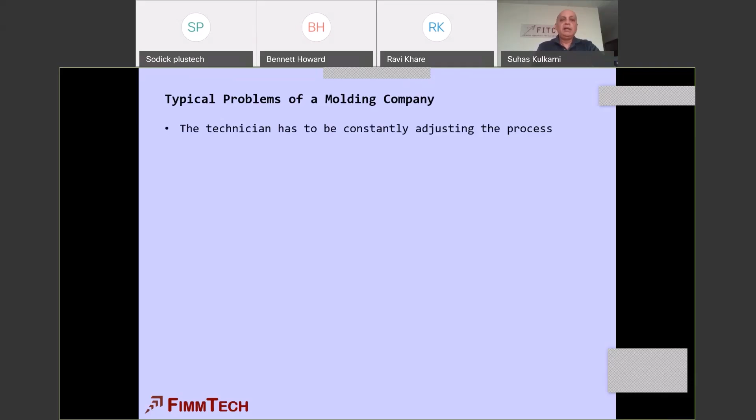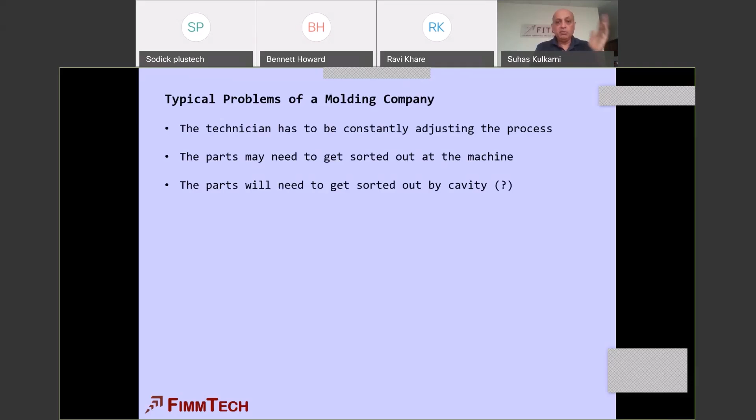So let's get into the presentation - that was just the introduction. What are the typical problems of a molding company? I'm sure all of you are going to relate to this. Technicians constantly having to adjust the molding process, parts have to get sorted out at the machine, parts that need to get sorted by cavity - don't tell me you guys don't know this, right? Sometimes cavity 4 is the one that's bad, so you have to sort it and throw it away.

Measurement frequency is very high, possible customer returns which affect your reputation, you have to rerun the parts, all that stuff. Tool engineers get frustrated because they have to add steel to the tool - these are only some of the problems, by the way. They had the tool done correctly, but then you said no, this part is now too big, so they have to change the steel, but now you have to go back and weld it.

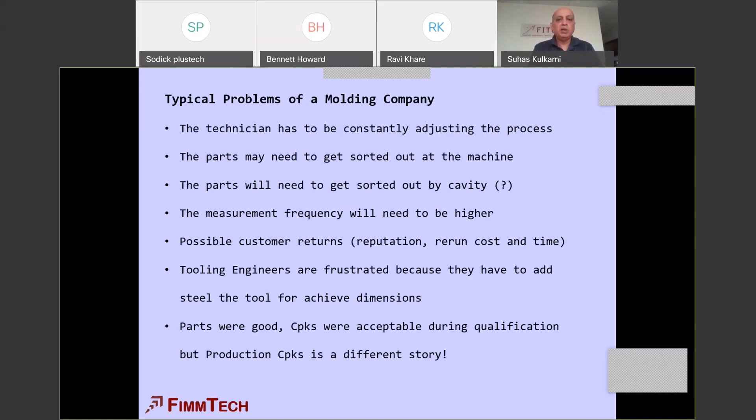Some typical things - parts were good, CPKs are acceptable during qualification. So you qualified the mold, fantastic, 1.67 CPK. Now you go into production, and my God, now the CPK is like 0.97. What happened here? So all these things are typical problems on the production floor.

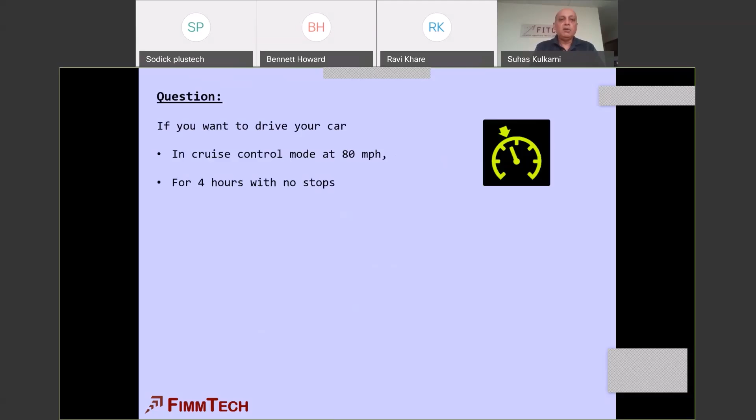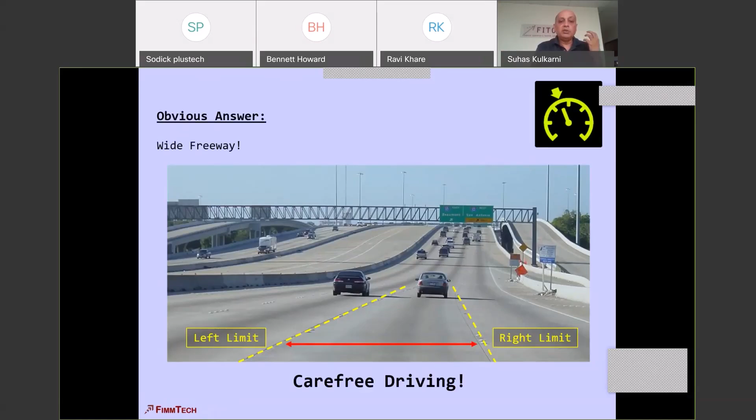You need a nice wide freeway so you can have carefree driving. There's your left limit, right limit. You get a phone call, want to drink water, and you waver a little bit, you're still going to be okay. So the choice is always a nice wide freeway for cruise control. Molding processes should also run under cruise control mode and have a nice wide freeway. We do not want a process that is at the edge of a cliff. Molding processes must be robust, repeatable, and reproducible. All three R's are extremely important.

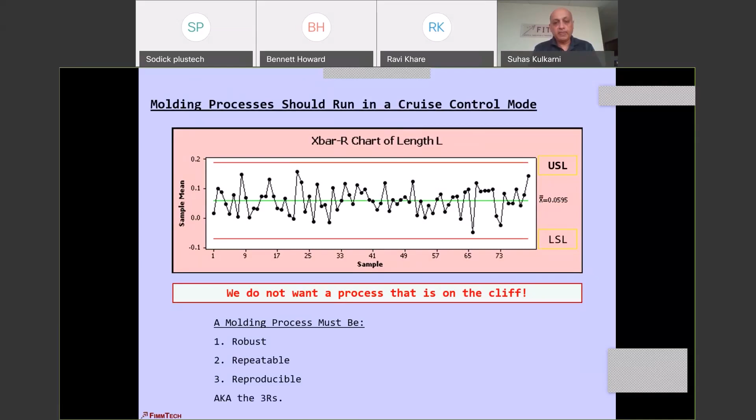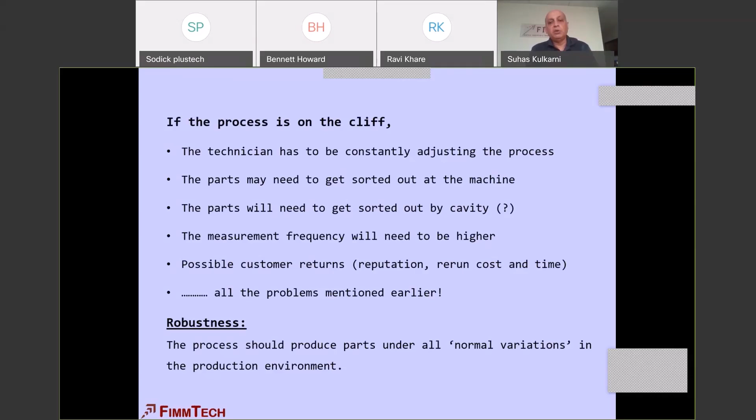Now, if the process is on the cliff, you're going to see all those problems we talked about. So robustness is one thing I mentioned, and a process should be robust. That means a process should produce all the parts under normal variations in the production environment.

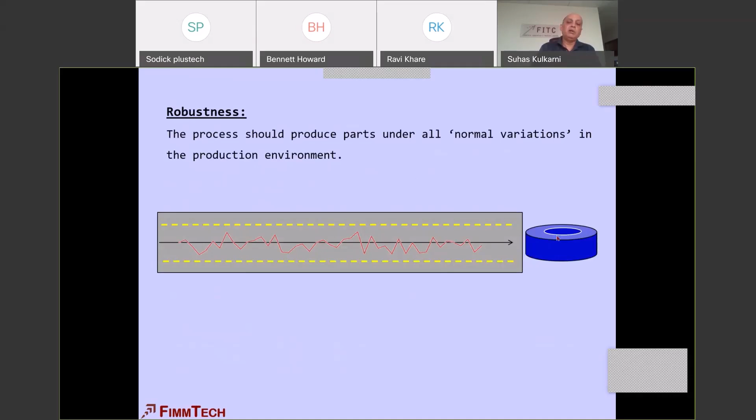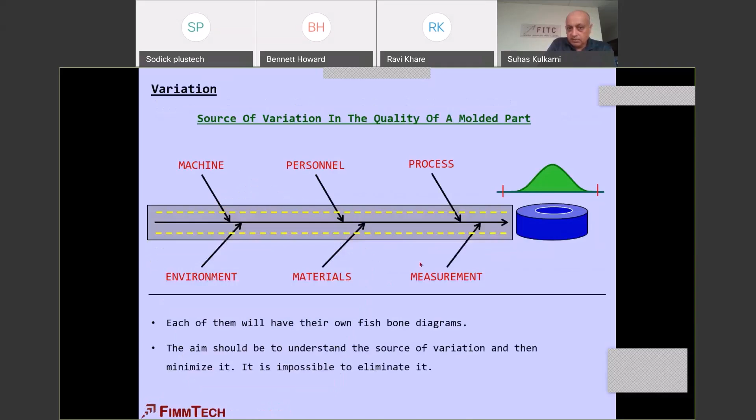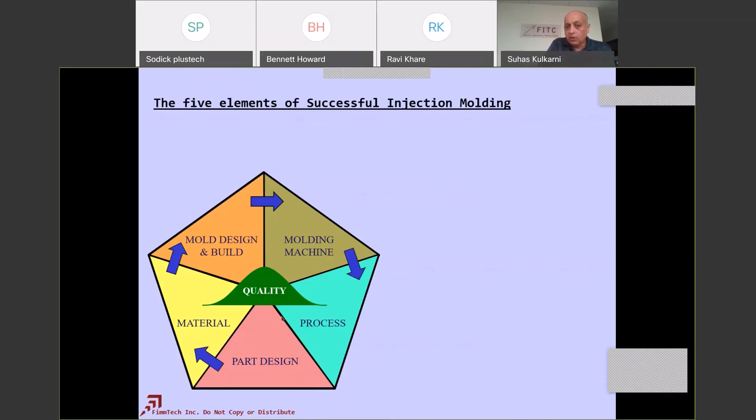Apart from this variation, remember that to come up with a good molding process, there are 5 elements that are important: part design, the material, the mold design and build, the molding machine, and last the molding process. All these elements are pre-production or pre-molding, and they're all important. It's like a relay race - all the runners in the team have to run fast enough to win the race. This is very important to know.

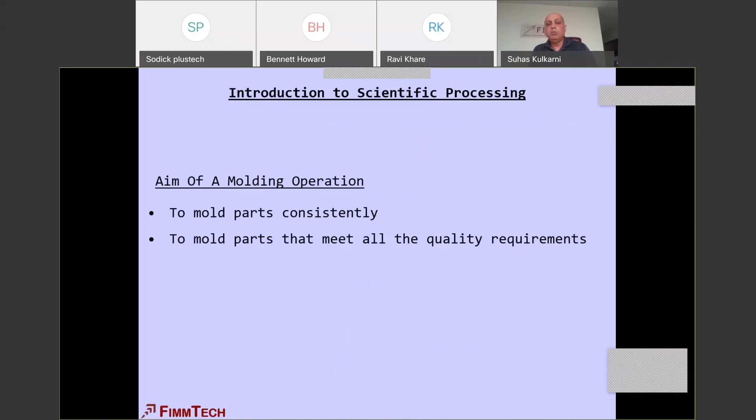So if you look at the aim of a molding operation, what do you want to do? You want to mold parts consistently, mold all the parts that meet all the quality requirements, and run an efficient process.

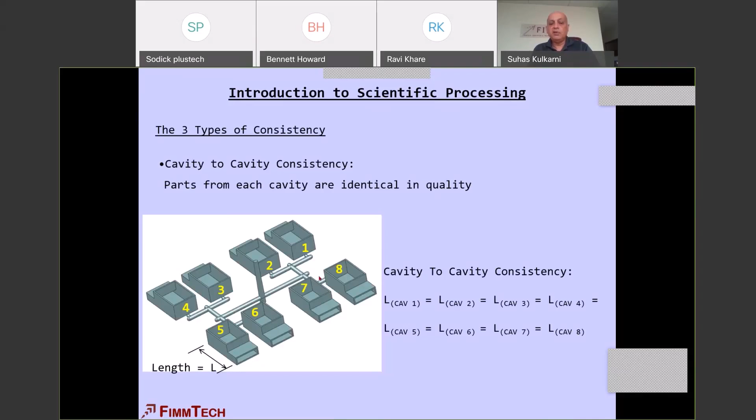Consistency - there are 3 types. The first is cavity to cavity consistency. Second is shot to shot consistency, meaning every shot has the same dimension. And then you've got run to run consistency.

That means you mold 100,000 parts, change the mold to something else, then change the mold back to the first mold. If the quality of the parts from this run and the first run are the same - meaning the average and variation in the first run is the same as the average and variation in the second run - then you've also achieved run to run consistency. This is the most difficult consistency for a lot of molders to achieve. Why? The main reason is robustness - the process was not robust to begin with. It is not repeatable, it's not reproducible.

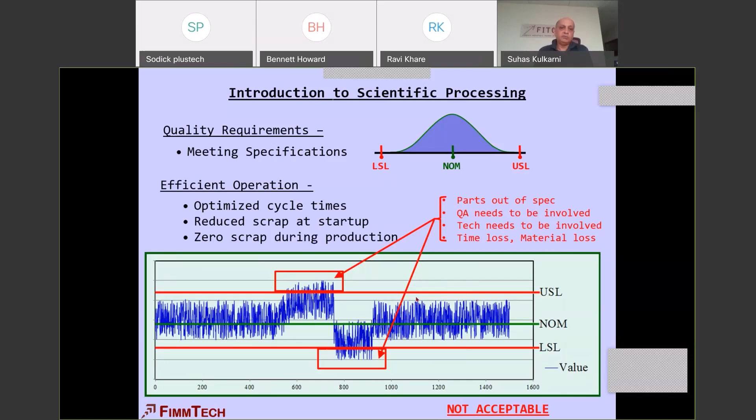Of course, you want to meet all the quality requirements, have a good efficient operation, and you don't want a process that runs like this. This is where you see a lot of loss in efficiency, a lot of returns and so on. Something like this is not acceptable. So going back to this, the source of variation can come from a molded process part.

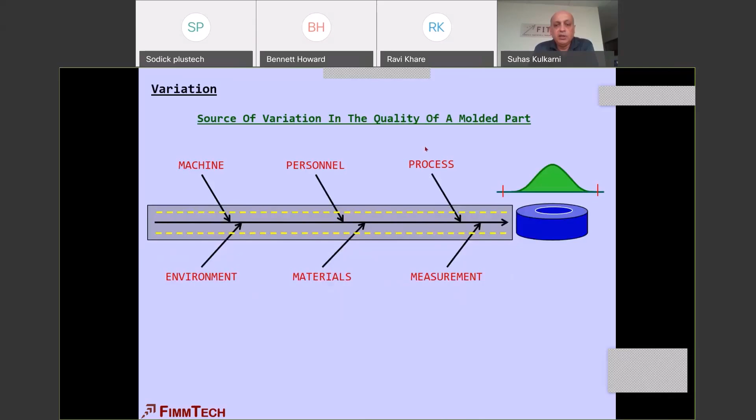It can come from various locations. However, we are going to focus on the process, right? So this is the first one I just showed you, the process. So now if you look at the molding process, where is the variation coming from?

A number of things, but we are now going to be talking about the process conditions, or the molding process parameters. How many are there? I have identified them as 11 plus 2 molding parameters on the machine, and 8 outputs. These 11 plus 2, I don't say 13, because if you don't split pack and hold into 2, and a lot of companies don't split pack and hold into 2, then you have 11, and if you do split them into pack and hold, then you have 13 parameters out there.

And decompression is there, it's a question mark. Again, I cover this in my 4-day class, I teach a whole 4-day class about it. So let's not look at this, but I say that is 11 plus 2 molding parameters. So variation in this is going to give you variations in the quality of the molded product.

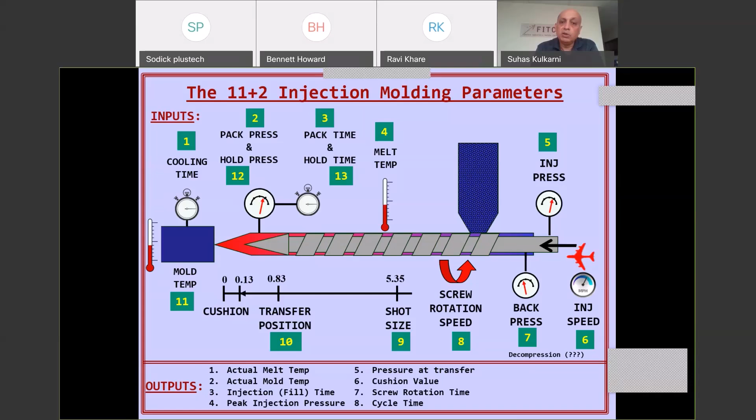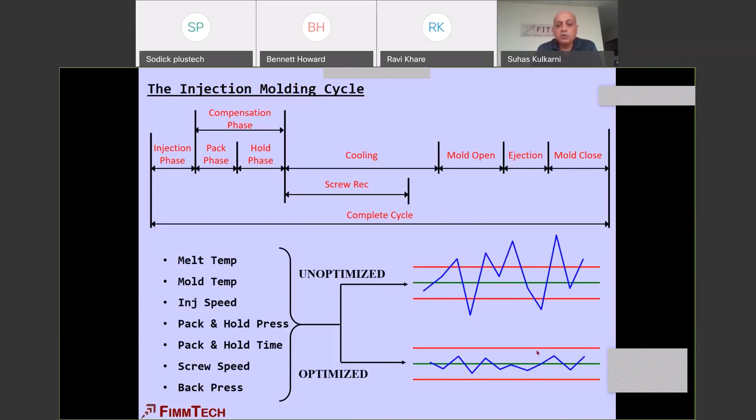So here's the injection, the complete molding cycle. Therefore, in order to have a good, robust process and to have a good cruise control process, then you need to optimize your molding process.

And so what do people do? If you look at the process development procedure right now, you have got the injection, pack and hold, cooling, during which screw recovery takes place. This is the whole complete plastic conditions that you need to optimize.

What do molders do? The first thing they'll do is the melt preparation studies. I don't know if a lot of people do these things now, but again, this is something that I've been teaching for the last 5-6 years, is that there's a melt preparation study. So you do melt preparation, screw rotation speed study, a back pressure study for coming up with this part of the cycle.

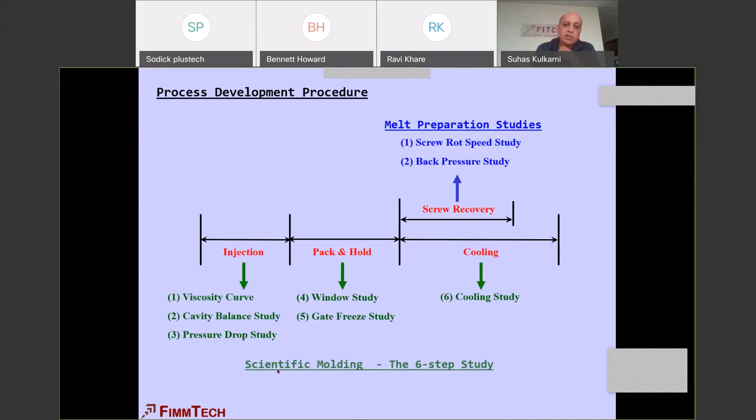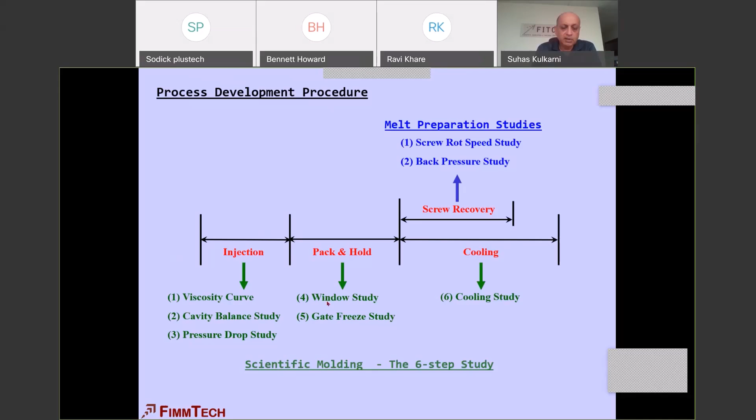And then you get into the scientific molding side, which I call the 6-step study. The only reason I call it 6-step study is so we know how many steps there are, it's nothing else. The term scientific molding was coined by Mr. John Bozzelli and the folks at RJG. So these are the 6 studies for that. People will do these studies and they come up with the process.

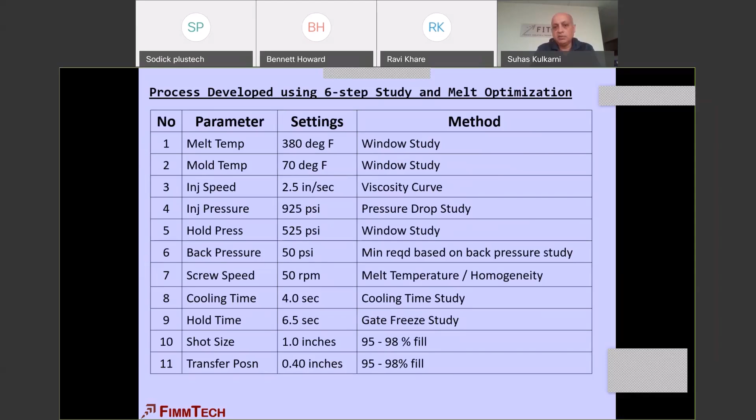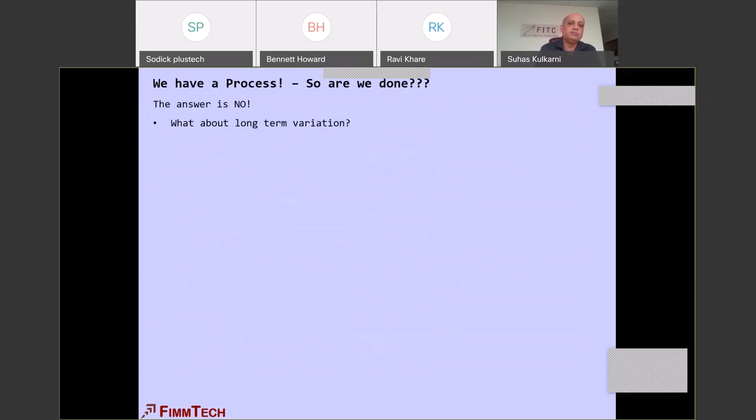So are we done? The answer is no. Why is that? Because what about long-term variation? Are the dimensions that we measured, where are they? Are they on the cliff? A lot of people will do a CPK study right there on the dimensions, but it is flawed.

Because if you take 30 parts back to back and do a statistical analysis, chances are they'll be extremely consistent. But that is not the representation of your complete production run in the future, or the next one that you're going to get. So are the dimensions you measured, are they on a cliff? Are you going to be fighting dimensions and cosmetics at the same time? I'm going to give you an example of this.

Are you setting realistic alarm limits? Alarm limits, very important. You say that the cushion value alarm should be plus minus 0.05 inches. Where do you get that 0.05 from? The pressure values should be plus minus 100 psi. Where do you get 100 psi from? So there has to be some data-driven decisions you need to make, data-driven numbers you need to come up with.

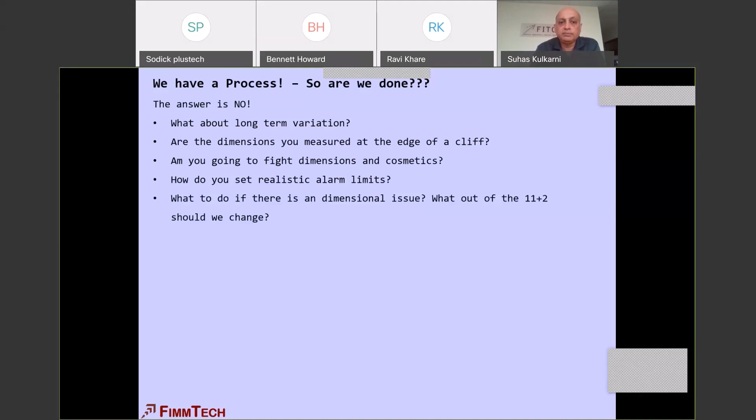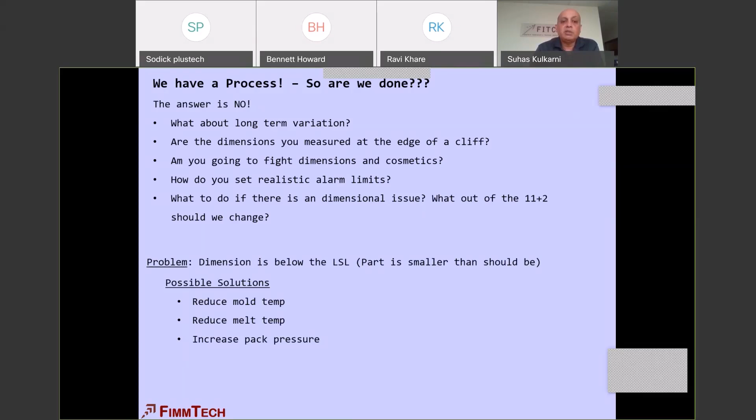If there's a dimensional issue, what should I change out of the 11 plus 2 parameters? As an example, look at this: the dimension is below the lower spec limit. So if you want to make a part bigger, increase the dimension of the part, then if I say go increase the dimension of the part, what will you do? Possible solutions are: you reduce the mold temperature, you reduce the melt temperature, you increase the pack pressure, you increase the hold time, you increase the cooling time. All these things will, in theory, increase the dimension of the part.

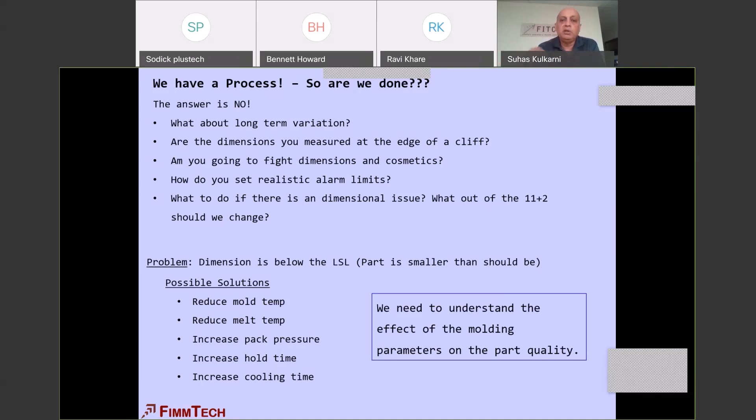We need to understand the effect of the molding parameters on the part quality, which one is going to give you the biggest bang for the buck when you change it. Is it melt temperature or mold temperature? There's no definite answer because it's part dependent, dimension dependent, and material dependent. All these answers are correct, but they depend on the particular things I just told you about. So we need to understand the effect of molding parameters on the part quality, right?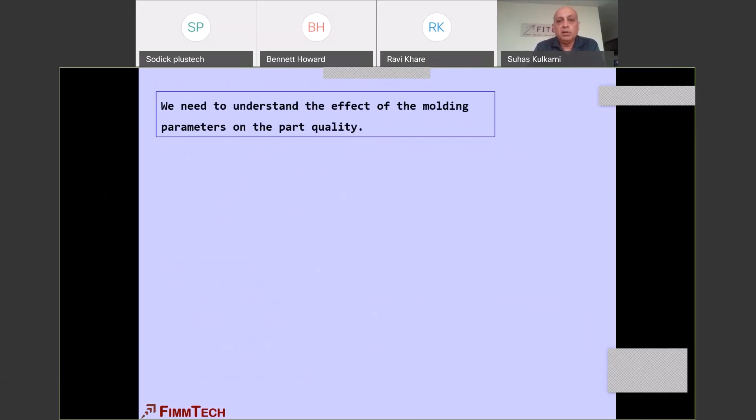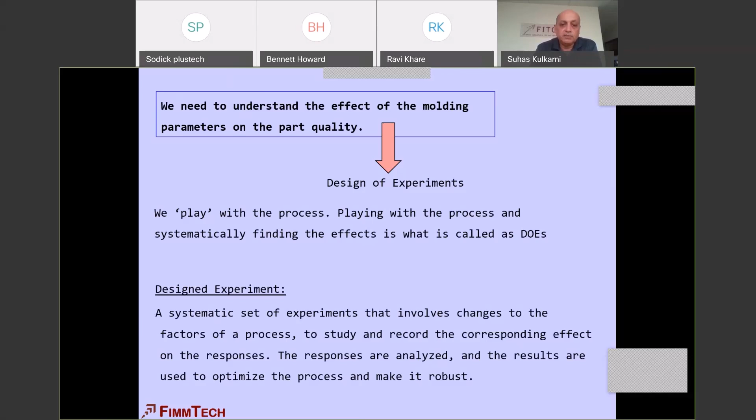And that is what design of experiments is. We play with the process. What do we do? Let's go change the cooling time and see what happens. Let's go change the packing pressure and see what happens. So we play with the process, and systematically finding what the effects are is basically what's called design of experiments. The definition is a systematic set of experiments that involves changes to factors of the process to study and record the corresponding effect on the responses.

Now DOEs have nothing to do with injection molding only, by the way. It's been around for a very long time. I got this from online, from psu.edu, where you can see the history of how DOEs came about, from R.A. Fisher in the 1920s to 1940s. He used it in agriculture, as some of you who studied DOEs probably already know. Afterwards, when the war broke out, they started using it in the war to increase yields and all that stuff. And then Mr. Deming came about and started implementing quality systems and all that.

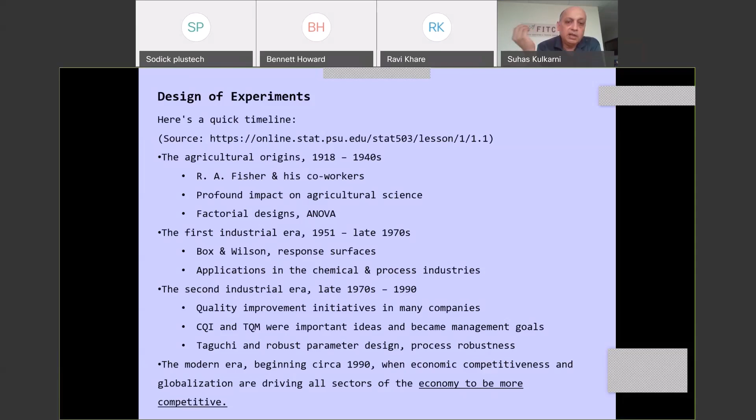And now, of course, we're using it more and more. One of the reasons the COVID vaccine is getting delayed is not because they're not able to make it, but the testing is going to take a long time. How do they test it? They go through a lot of DOEs. They have to go through a lot of factors, a lot of variation, underlying conditions, and all that stuff. So DOEs have been used in several industries.

My favorite wine is the Meiomi Pinot Noir. So if any of you want to send me a gift, that's what you need to send me.

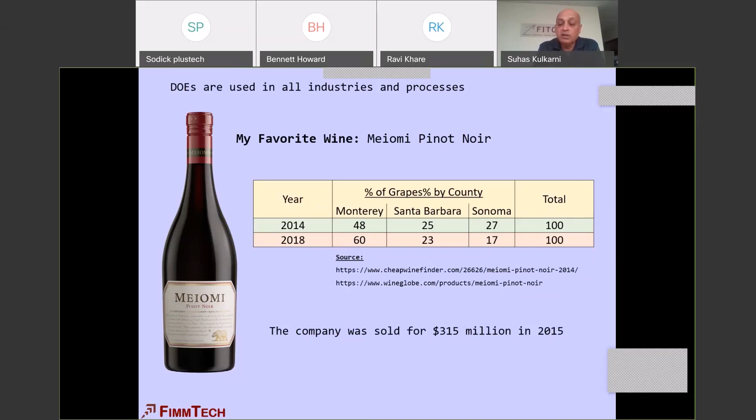But they use this in the wine industry, food industry, everywhere. So why don't molders use it? If it's so useful, why don't molders use it so often?

Because of the misconceptions. Number one, they say it's too complicated, that one needs to understand math and statistics. Then they say it takes a lot of time to perform these studies. There's a lot of waste of material and resources. It takes a lot of time to measure all the cavities, all the dimensions, all the runs. Then I need to learn how to use software and interpret the results.

Minitab is a fantastic software. If you guys know how to use it, more power to you. But I always say, for what we want to do, it's like taking an airplane to the grocery store. You want to go to the grocery store, you don't need to take an airplane, right? It's just like that. So use something simple.

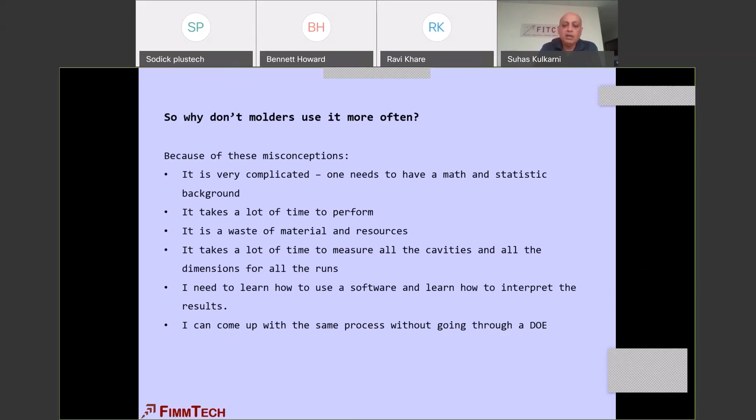Then the other thing they'll say is, you know what, I don't need to do all this DOE because I can come up with the same process without a DOE. Yeah, you can come up with the same process, but there are a lot of other benefits that you get, which I'll talk about very soon. So for all these reasons, people don't do DOEs. So let's go into molding now.

So effect of packing pressure: if I increase the packing pressure from 4,000 psi to 8,000 psi, the dimension goes from 1.726 to 1.735. What does this mean? An increase in the packing pressure by 4,000 psi increases the length by 9 thousandths of an inch.

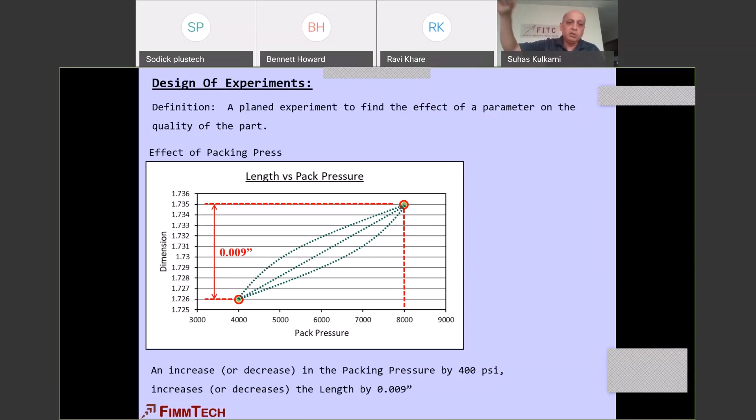So what did we do here? We systematically performed two experiments, one at low pressure and one at high pressure, looked at the dimensions, and plotted the results. This is a dotted line because this relationship can be anything - there's always a curvature there. In molding, we have to be careful because there's always a physical limitation to the tool. You cannot keep packing it and expect dimensions to keep increasing.

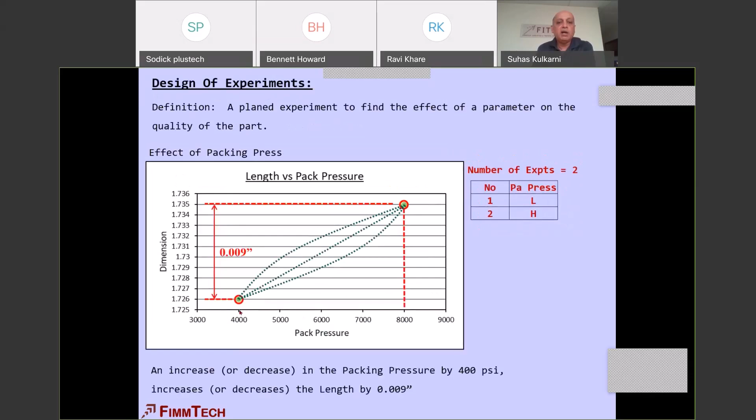So what have we done? We've done two experiments, one low and one high. This is the most basic DOE, because you've systematically done these experiments. Then I say I also want to look at the effect of melt temperature. I did packing pressure first, melt temperature second. So what do I do? I repeat the same high and low experiment at the high and low melt temperature. So I end up with 4 experiments.

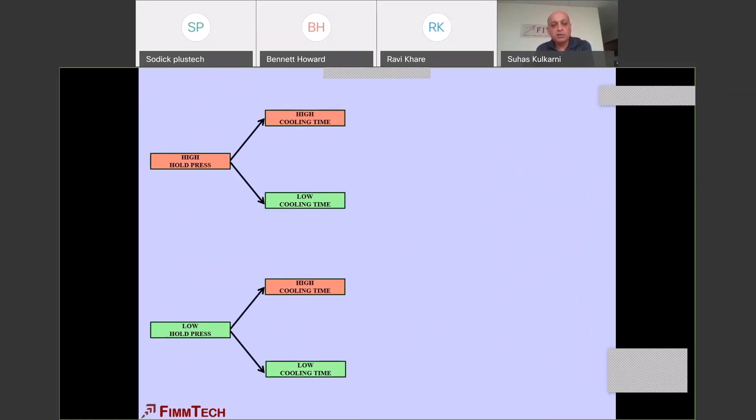Then I say I want to add mold temperature. So now I add another 4 experiments, repeating the same 4 at the high and low of the other one. So I end up with 8 experiments. If I add one more, it becomes 16 experiments. As I keep increasing the number of factors or processing parameters, the number of experiments keeps doubling because I'm studying low and high - these are called levels. At 2 levels, they keep becoming double.

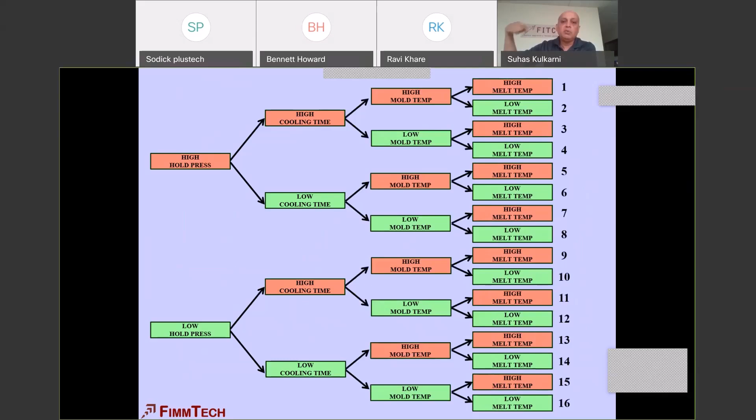In fact, all of you who do scientific molding studies have already done a DOE. Look at your gate seal study - part weight versus time. What have you changed? You've systematically changed the times and collected the part weights. That's a DOE. So all these things are DOEs too.

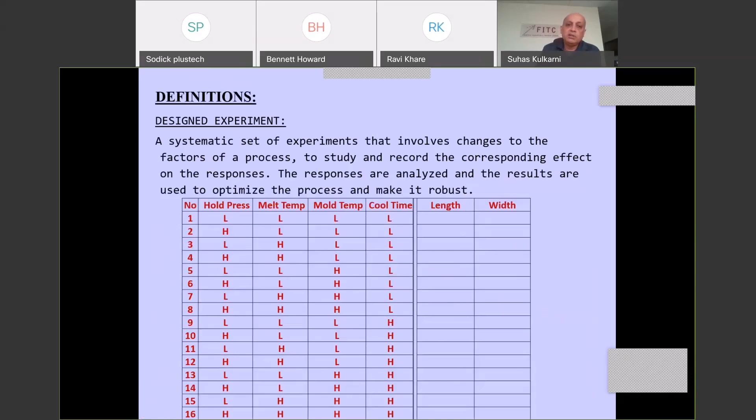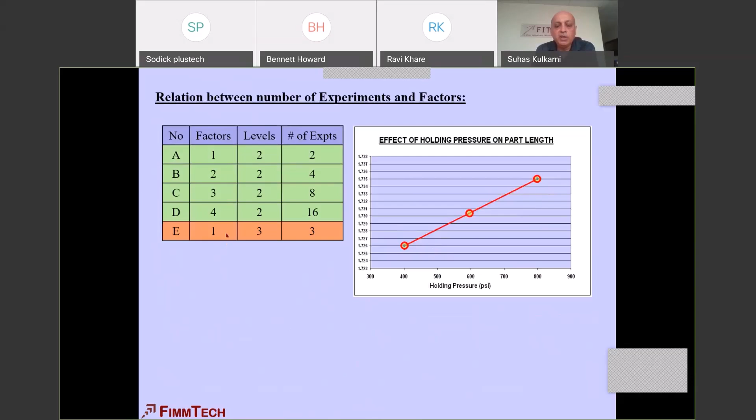So changing the 11 plus 2 factors and finding the resulting dimensions is basically what's called a designed experiment. But here's the problem: if I've got 1 factor and 2 levels, I end up with 2 experiments. If I go to 2 factors, it becomes 4, then 8, then 16. If I decide to do 3 levels - low, medium, high - with 1 factor I get 3 experiments, and with 2 factors that becomes 9 experiments.

So as you increase this, you'll find the number of experiments needed equals the number of levels raised to the number of factors. That's the formula. If you do that calculation, you'll find that at 13 factors and 2 levels, you end up with 8,192 experiments, and at 3 levels, you end up with almost 1.6 million experiments - which is impossible for you guys to do.

That's one more reason a lot of people don't do DOEs in industry - they say there are too many factors in injection molding. But first thing, there are only 11 plus 2 factors. I've heard people say 30 factors, 40 factors when I start my class - no, it's just 11 plus 2 factors. But if there are too many factors, that's one of the reasons people don't do DOEs, because it becomes an impossible job.

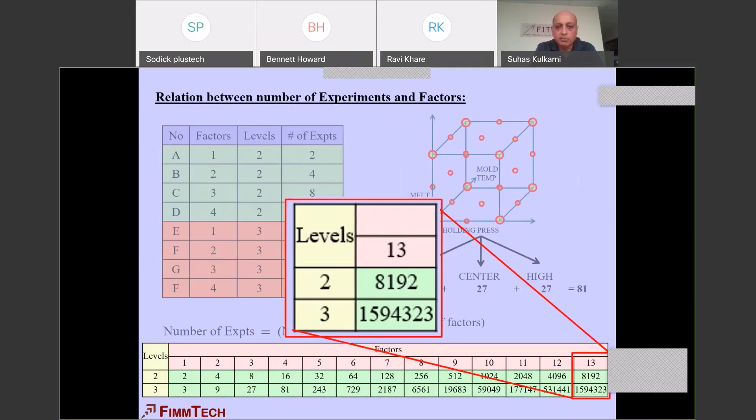So what do you do in that case? I'm not going to get into the details, but this is where statisticians come into the picture, and people who do data analytics come in and say, you know what, it's not that bad - there's something called orthogonal arrays and something called interactions. What we do is take all these things and perform confounding.

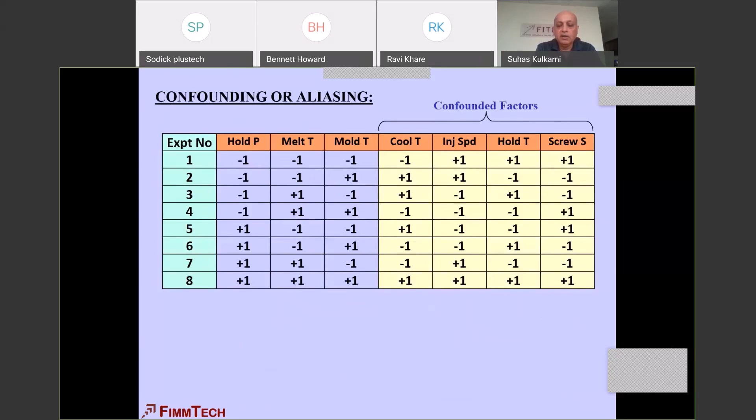And then basically, instead of running all those 8,000 experiments, you can run just a few of them, and those few are now going to predict what the quality of your part is. And so that is what statisticians do.

I'm not going to go into details of this because of time limitations, though I do teach some of it in my class. If you want something really detailed, Ravi can come and teach that too. They do these things called fractional factorial experiments, and there's several models out there for DOEs, like Fisher methods and Taguchi methods, so on and so forth. You can do all this analysis and come up with what factors are most important for you. Minitab is one software you can use.

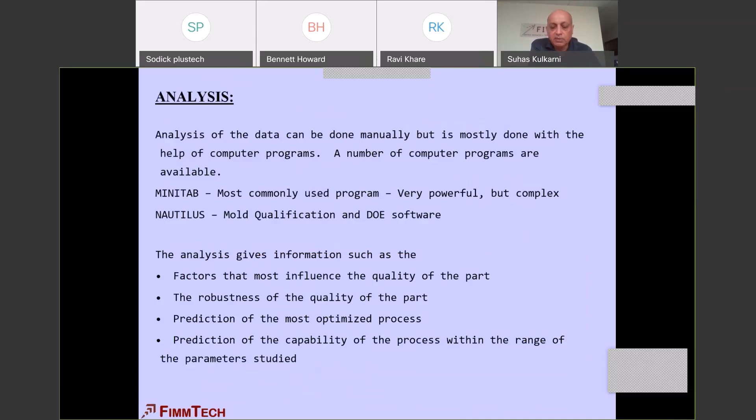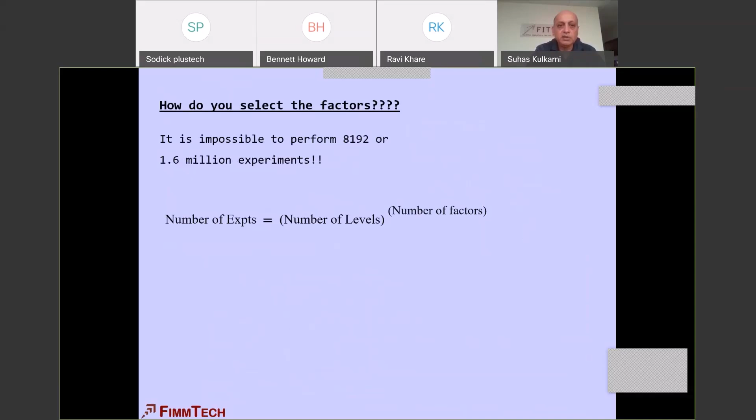Nautilus software, which I'm going to show you here, I made very simple. But then how do you select the factors? I'm sure you guys are interested in this. How do you select the factors? I can't run these many experiments, so first you need to understand the molding side of it.

Everything comes from the PVT diagram - you've got a pressure, volume, and temperature graph. In injection molding, what are you doing? You're taking plastic and melting it. You give it temperature, melt it, then pressurize it and inject it into the mold. As it's being injected inside the mold, the part is cooling down, so the change in volume is the shrinkage. Anything affecting the PVT is extremely important in your DOEs.

So if you look at it, mainly it's pressure, volume, temperature. Pressure and volume are related to each other, and all these things are of course related. So pressure, volume, and temperature are important, and therefore, when we do our scientific molding studies, we start looking at our 11 plus 2 factors.

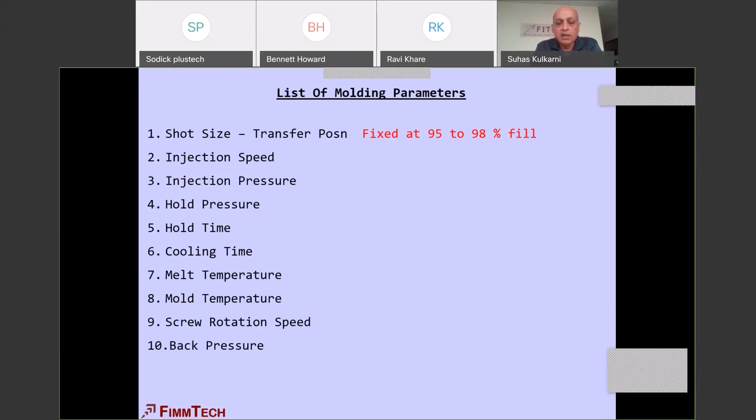How do you find injection speed? You do a viscosity curve and select your injection speed. Do you want to go slower? No. Faster? No. You've set your injection viscosity curves and injection speeds there. Injection pressure on closed loop machines is fixed - the machine takes what it wants from what's available to it. So if you change that up and down, it's not going to matter.

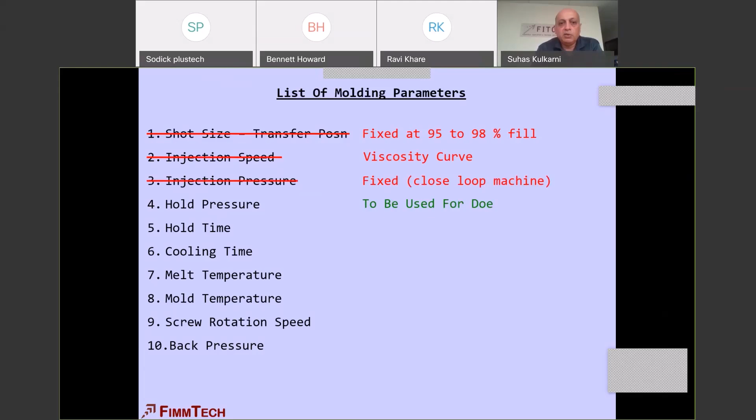I've called this the holding pressure, as this is actually pack and hold pressure - yes, use this for DOEs, very important. Holding time is fixed for cold runner systems; for hot runner systems you may have to use it. Cooling time, use it for DOEs, yes, because it's a cooling rate. Melt temperature is yes for amorphous materials. Mold temperature is yes for crystalline materials.

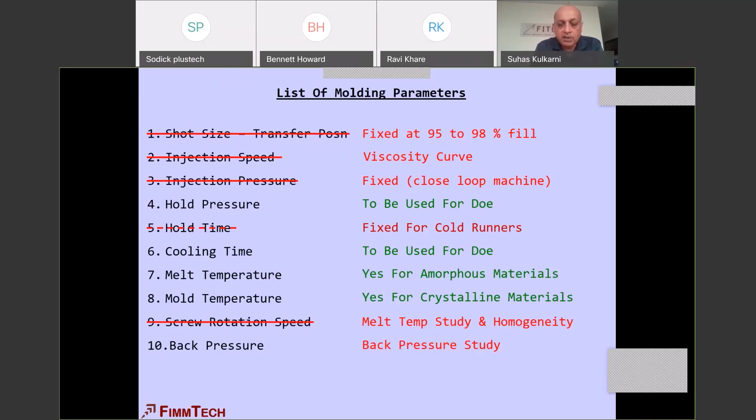Again, why is that? We cover that in the class. We set our screw rotation speed based on a melt temperature study, looking at homogeneity, and we also set our back pressure based on a scientific back pressure study. So based on data, we've set those numbers there.

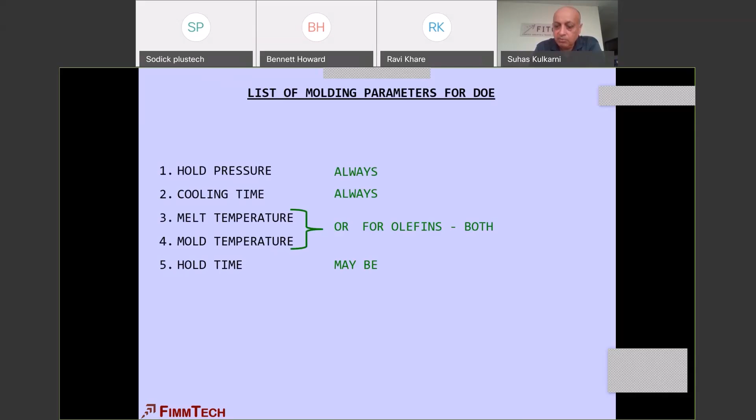And therefore, the factors you want to study for DOEs are basically always your pack and hold pressures, always your cooling times, always your melt or mold temperature. If it's in olefins, you may have to use both - the word is may. You may have to use both of them, and it may be holding time for a hot runner system. In most cases, if you're running a cold runner mold, 3 factors is more than sufficient. You don't have to do all the 1.6 million or 8,000 experiments - you can get away with running 8 experiments, and that's going to give you all the low-hanging fruit you need.

Is injection speed important? In some cases, yes. It'll have to go on a case basis, but in most cases, no. Is back pressure important for doing DOEs? Absolutely not. Why is that? Because the effect of back pressure, on a scale of 1 to 10, is 2, whereas packing pressure is 8. So what do you go change? Packing pressure in that case.

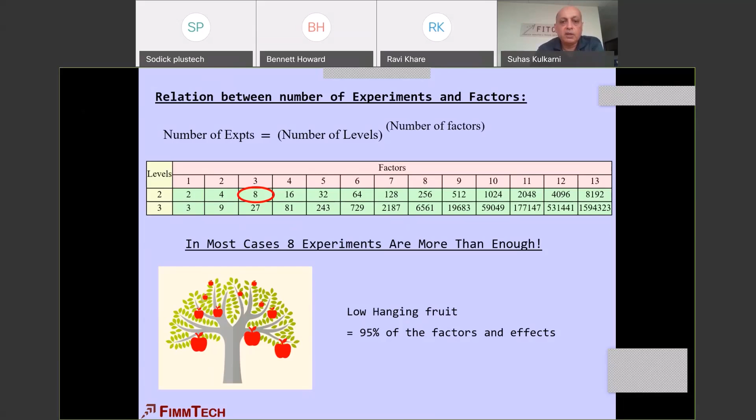Having said that, I'm going to quickly go to my software. It'll be very quick. There's a nice 23-minute video on my website, that's the short version, to show how powerful this software is. But I'm going to go to the software here and show this to you guys.

This is my software. There's a home screen, a database here with all 3 databases. On the project, you can see all these icons: melt preparation studies, 6-step study, scientific molding studies, plastic process sheet, and so on, of which I'm going to go into the DOE. I'm going to show you how easy the DOE portion I've designed here is.

You can see in the DOE, the first window has a drop-down list. You select the factors: cooling time, melt temperature, holding pressure. Of course, you can type your own in here. But notice, I only have 5 factors. You cannot add more than this.

Is it easy for us to put, say, all 11 factors here? Yeah, but we don't need it. I want to keep it simple for you guys.

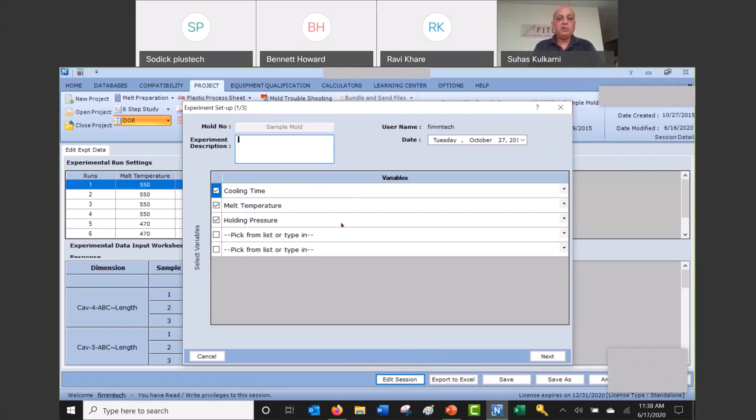This is step number 1. Step number 2: put in your high and low numbers. What do you want to study? I want to study holding pressure from 800 psi to 1200 psi, because when I did my process window, below 800 I got short shots, and above 1200 I got flash. So these are my physical limits here. I'll tell you what this precision number is soon.

This is step 2. Number 3, put in all the dimensions that you want to check: your nominal values, tolerances, sample sizes. This is not statistical analysis—very important—you just need to check 3 to 5 parts, not 30. If it's a family mold, select which part this dimension belongs to, and simply click on worksheet. That's how simple the software is, guys.

It spits out these 8 experiments here. You can see there's 8 runs. We do full factorial experiments, 3 factors, 2 levels, so that becomes 8 experiments. You run one confirmation run, so these are the 8 experiments plus 1, making 9.

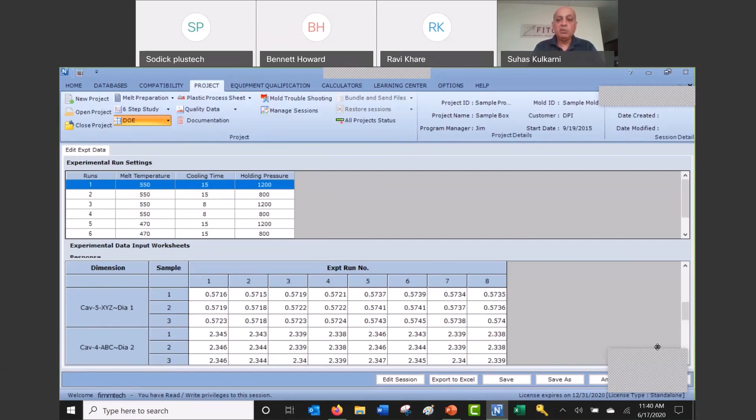Go to the molding machine, run your parts, collect all the data, put it all here. You can also collect an Excel sheet and dump it in here if you want—actually that's preferable. Then for experiment 1 through 8, sample 1, 2, 3, for all the dimensions you see here, you simply come and click on analysis. That's it. Like I said, I've achieved my goal of making life simple for the molder.

So now if I tell you to go change the dimension of the part, what are you going to change? You're going to change holding pressure. Are you going to touch B, cooling time? No, because cooling time makes no difference on that part—don't even touch it. So now you're making data-driven decisions based on this.

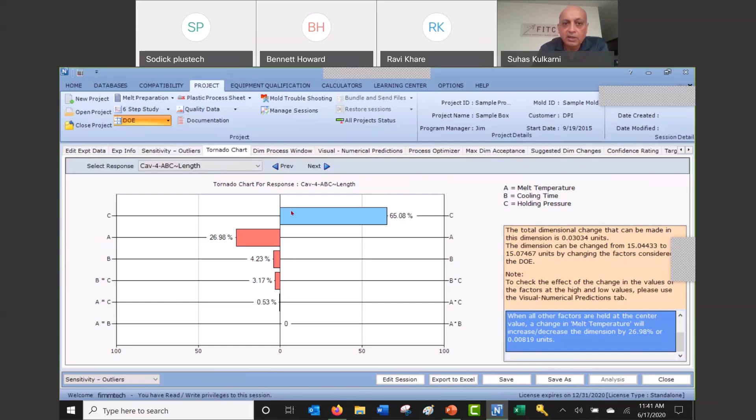The software is only analyzing it. Now, how accurate is this? I will show that to you very soon here. So now that means what?

Okay, so you can do this. We can also simulate the process. This is cavity 4, this is cavity 5, this is the length of the part, this is the lower spec limit, nominal, and upper spec limit. At a setting of 510, 11.5, and 1000 psi, the predicted dimension of cavity 4 is 15.0589, for cavity 5 is 15.0749. I can now come and change the process right here, right?

If I change the process, what happens? You can see the X is going up, this will become red, out of spec. I can decrease my cooling time, increase my melt temperature, right? I can do a complete simulation of the whole process right here for you, right?

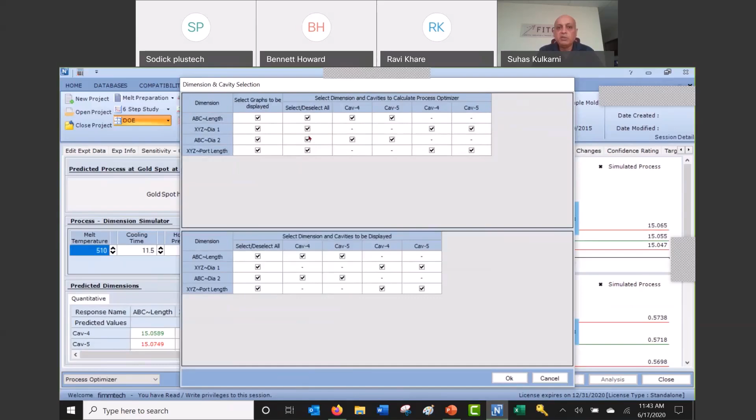Okay, so the software, you can come in and say, tell me the best process. We can also optimize based on the dimensions and the cavities that you select. It tells me my most optimum process spec, coming to nominal here. It tells me basically that my most optimum process is 550, 15 and 1025 psi here. So we also give the most optimum process.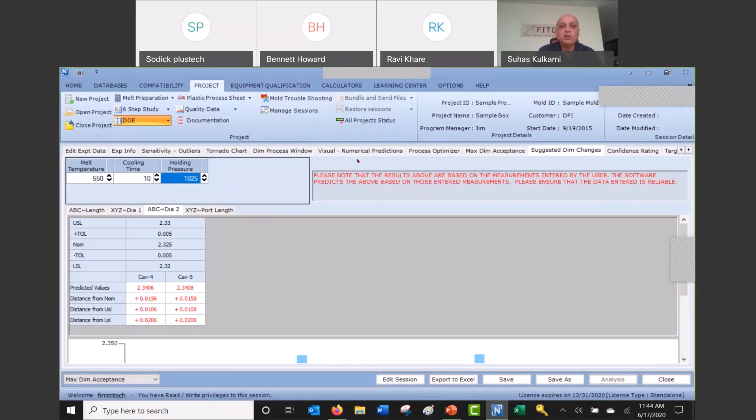I know now the software will also tell you how much steel you need to change. So there are several things you can do with the software. Basically it tells you what your process windows are, it can tell you the most optimum process, and it can simulate the process - all this stuff the software can tell you.

And then that's how you come up with the preferred process, right? You come up with the process that you really need to run, and give dimensions and see what the windows are and all that sort of stuff. Once you have the molding process, you can record it in the plastic process sheet, and under compatibility, the software will also tell you.

Selecting that thing here, when I do display compatibility, the software will tell you which machine, other than the machine you ran it in, which machine will it fit in, as far as percentage shot size goes and residence time goes and all that stuff. But that is one tab.

The second tab is process machine compatibility. So machine 5 is where I came up with a good robust process based on scientific molding and DOEs. And now I can predict and give you the process for every other machine in the database. What is red is not acceptable, what is green is acceptable.

So now if I decide that I want to run this in the H machine here, I come in here, select H, click on go. The software will now come up with a process sheet for that machine where you have never run this before - all based on calculations, by the way, in this case.

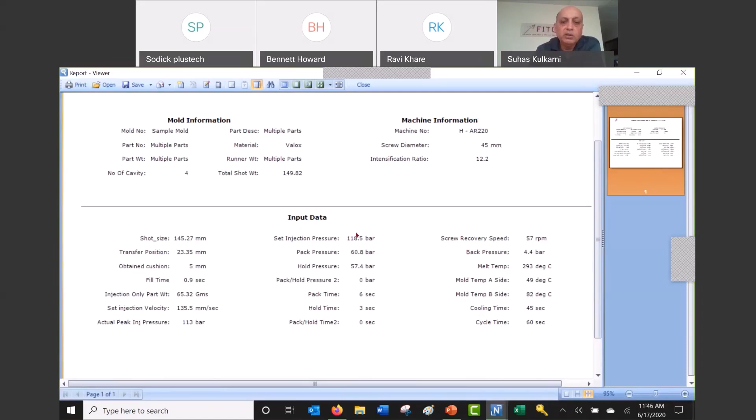So this is a process sheet. How did you come up with this? You know that this process is robust because you have done the DOE on this. Most importantly, okay, so again, it takes me almost 1.5 hours to show you the software.

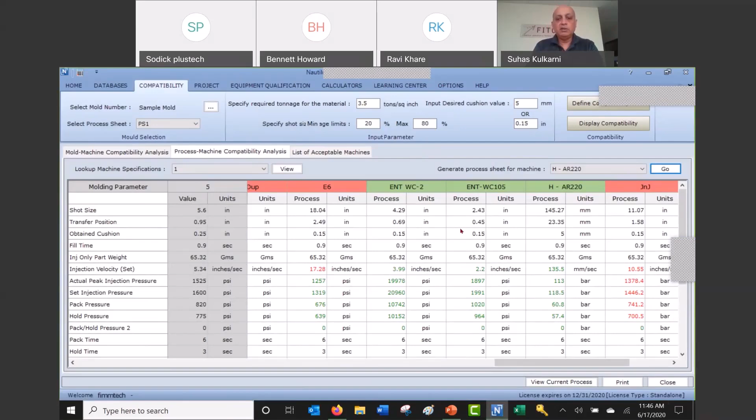There's a very quick 23-minute video, please look at it on the software side of it. But I want to get back to my presentation here because I want to take some questions also.

So a good example is this. There's a company that was always making bad parts and having issues with customer returns. So what did I do? There's a part that had sink and the length was important. First thing I did is a process window for sink and flash, and decreasing the pressure would bring the parts in spec, but that would increase the chances of sink. I'm sure you've seen this, right?

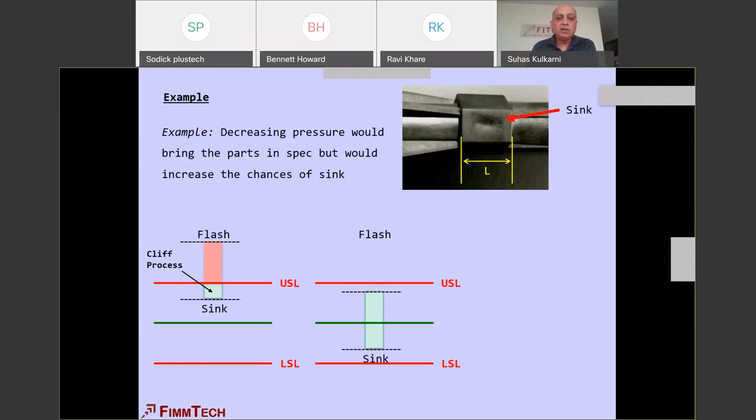So this is how the process window was. How did I know? Only because I ran the DOE in this case. So what do you do? You simply come in here and center the process right in the steel based on the DOE data again. Now, first thing, you choose a robust process with a nice wide window on both sides and adjust your steel, and now you're going to have a good robust process.

In fact, in this case, there were 3 dimensions that the customer literally stopped measuring after this. Before that, they would always get rejects from their customers because of either sink or dimension out of spec. How good is my software?

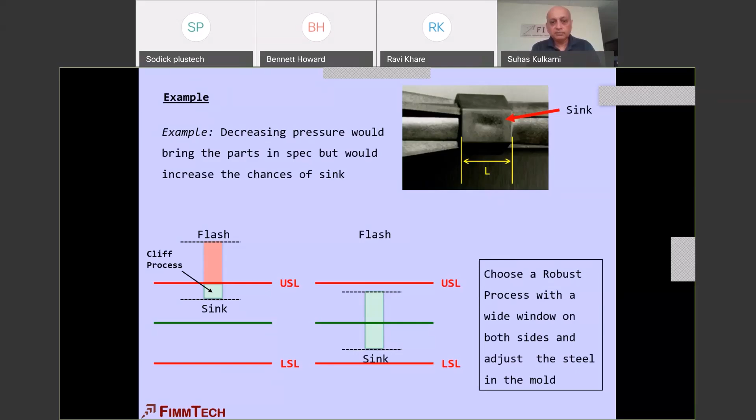Then the process transfer, how good is that? If you look at it, a customer of mine moved from a 50-ton to a 110-ton machine. Using that printout that I showed you, they were able to get the dimensions within 2 tenths of a thousandth, and almost 9 tenths of a thousandth. So again, excellent prediction is what we get through the software.

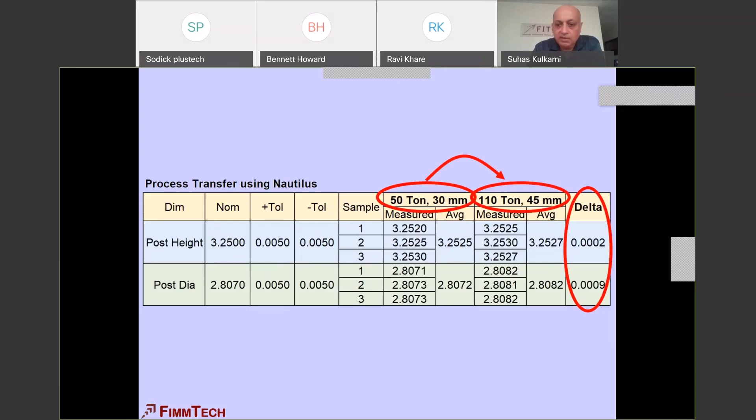Okay, again, everything is data, guys. There's no 'let me go change this, let me change that.' And that's the biggest thing that is very important.

Another customer saved $100,000 - it's right here, an irrigation company. They saved a lot of money on this, again all based on doing DOEs. They found out they could run the parts much better, reduce inspection, all that stuff. Again, without doing a DOE, you would never know how fast you can run a mold. You would never know where the dimensions are and how soon the dimensions can go out of spec.

The cost of the software, by the way, is equal to the cost of one mold trial on about a 75-ton press. Okay, it's $2,000 a year. We constantly add stuff to it, and that's why it's a subscription-based model, just in case you guys are wondering why. There's lots of stuff that Ravi and myself are working on, very cool stuff that should be coming up here very soon also.

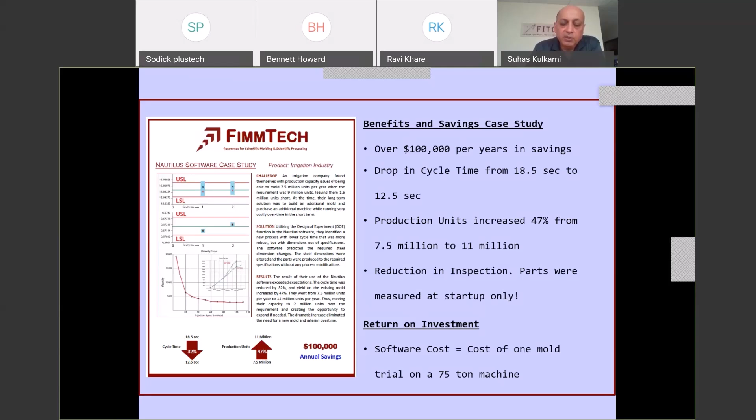Okay, so I always do a 2-stage approach. Scientific molding is one part of it, and then basically I've got the second part, which is the design of experiment. So I highly suggest that you guys do these things. Again, these flowcharts are available at no cost and for free. So send me an email, I'll be more than happy to send you this information.

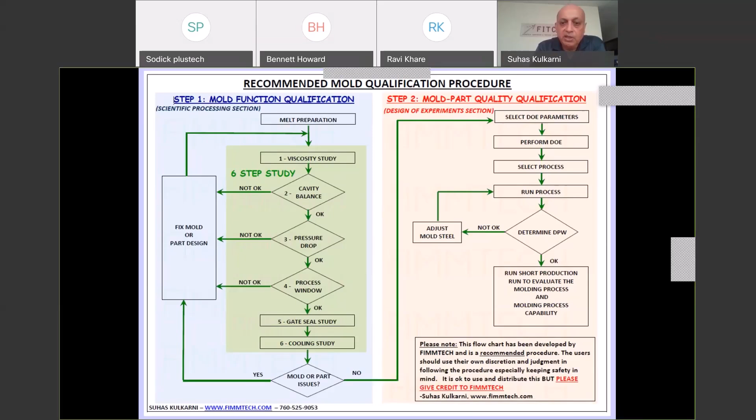Absolutely. One more thing I want to tell you, there's fantastic technologies out there. For example, there's pressure sensing technology. But again, if you don't have a good, robust process, those technologies will not be useful for you guys.

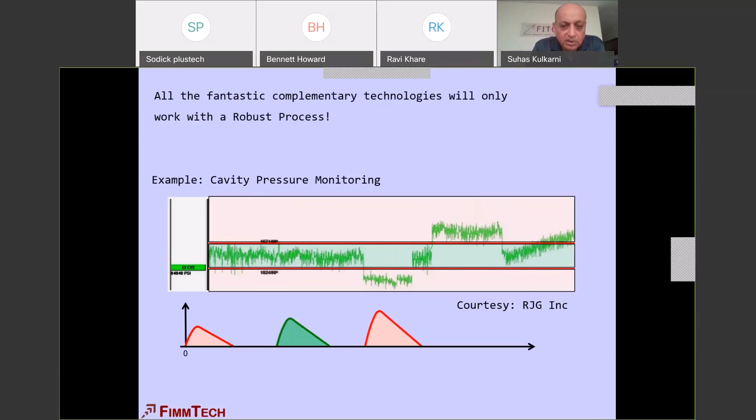So I think this is great stuff to maintain and monitor your processes and look at the parts, and if you're going to be using this, I think you guys should be doing DOEs also. So it's very important to set alarm limits. How do you set alarm limits? This all should be based on data.

Again, you may have the world's best machine out there, you might have very good machines. I know I've heard very good things about Sodick machines. I have a customer down in Texas that uses, I think they've got a lot of machines down there.

They mainly mold small parts, but I know Sodick makes machines that are even larger ton machines, and I'm sure the technology transfers. So definitely, you may have the really good machines, but you also need to have good processes. This is very important.

So why don't molders do DOE very often? Let's look at this. Is it very complicated? No, it's very simple. I showed you, like 4 clicks and you've got analysis.

Do I need to understand math? You don't need to understand math. Does it take a lot of time to perform? Not really - 9 runs of 5 shots. Usually in 2 hours you should be finishing the runs.

Okay, do the calculations, guys. Within 2 hours, you should be running all the DOE parts. Waste of material and resources - yeah, it is that amount you use. If you don't do DOEs now, you're going to be wasting all that material in production, because you're constantly running to the presses and having bad parts.

It takes a lot of time to measure all the cavities. That is absolutely true, but there's a way I can tell you how to reduce measurement - let's talk about that offline, but there are ways. Measurement does take the most time, with small dimensions and all that stuff, but I've got a way around that, and I'll talk about it.

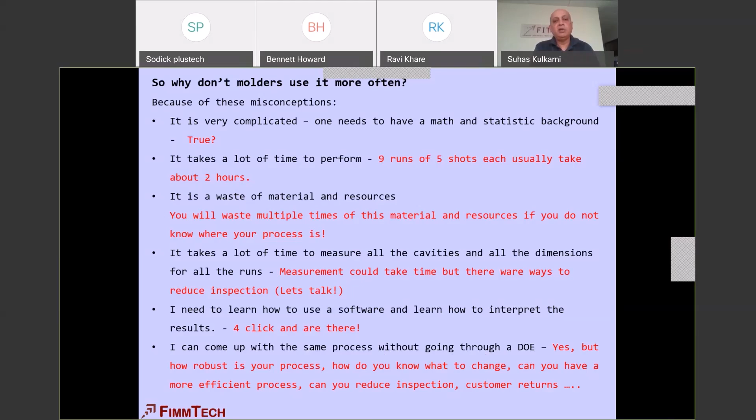One main important thing I've seen is that you have to have management support. Your management has to understand that DOE is a valuable tool. If management does not agree with that, it's going to be a challenge for you to implement it in your company. Okay, so that's it - I think I made time.

So having said all this stuff, I just hope you guys agree that DOEs are not complicated. I think I'll stop here and take some questions. I believe there are some here, let's see.

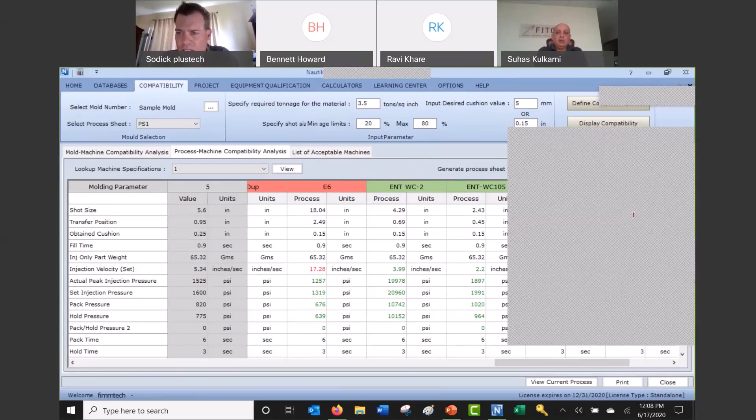Excellent, looks like there may be 10 to 15 more questions. Are you seeing all those, Suhas? I can let you - I'm not, but I think, okay, I don't know if people are still online. Yeah, okay, we still have a number of them here. Okay, let's keep going, I can answer them.

First one was about LSR materials, which you spoke of. Next one - how would these approaches be done using overmolding? Very good question. With overmolding, your first shot is now going to be a factor for your second shot. You have to first come up with a good robust process for your first shot, and once you know you can mold good parts and hit the dimensions, you fix the first shot and then start the DOE on the second shot.

Are there any variations or variants to the software, or is it just one purchase required? It's on my website - there's the software versions and stuff. If you guys go to the software section, you'll see that.

Do we get CPK values? There's a quality section we can give you, but it's a different section - it does not come in the DOE side of it. Ravi's expertise is all quality systems, and there's a number of things he can also provide. What we're going to do is have a full quality system into our software too very soon, and that would be included in the price if you go to a subscription model. It's going to be a very complete, detailed software, including SPC and all that sort of stuff. It's not in the September one, but it will be coming up very soon.